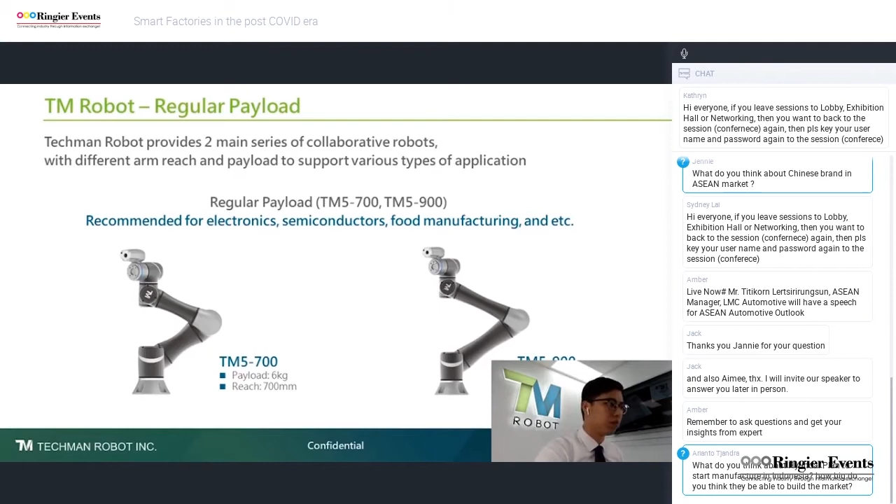And this is our medium heavy payload series, TM12 and TM14. In TM12, the payload is 12 kilograms with a 1.3 meter reach. For TM14, the payload is higher, 14 kilograms, but the reach is slightly shorter, a 1.1 meter reach. This is recommended in some industries like metal, doing machine tending, which need higher payload and longer reach.

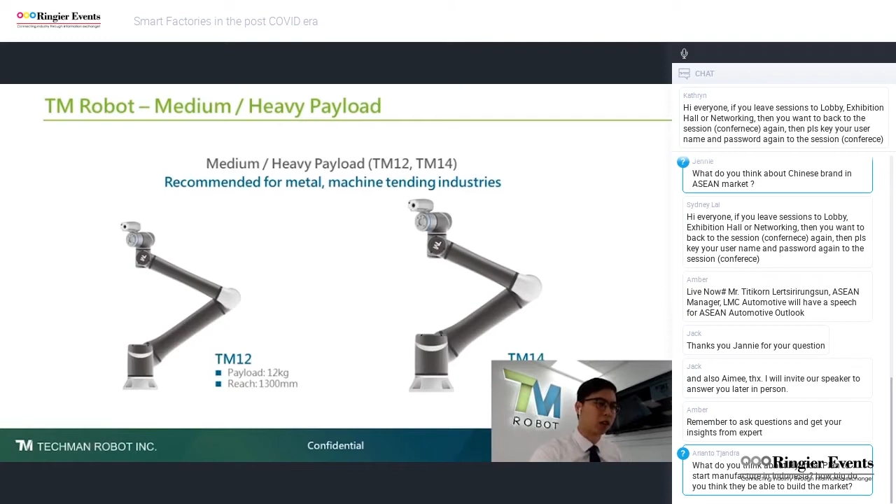And this is the TM Robot Mobile series. Why did we create this series? Normally, if you want to integrate robots with AGVs, auto-guided vehicles, you need an extra converter to change the power supply from AC to DC power supply. This converter costs extra money and takes too much space in the AGV. So with the TM M series, mobile series, you don't need to spend extra money and waste extra space in your AGV. You just buy it and integrate it with your AGV in a very short time.

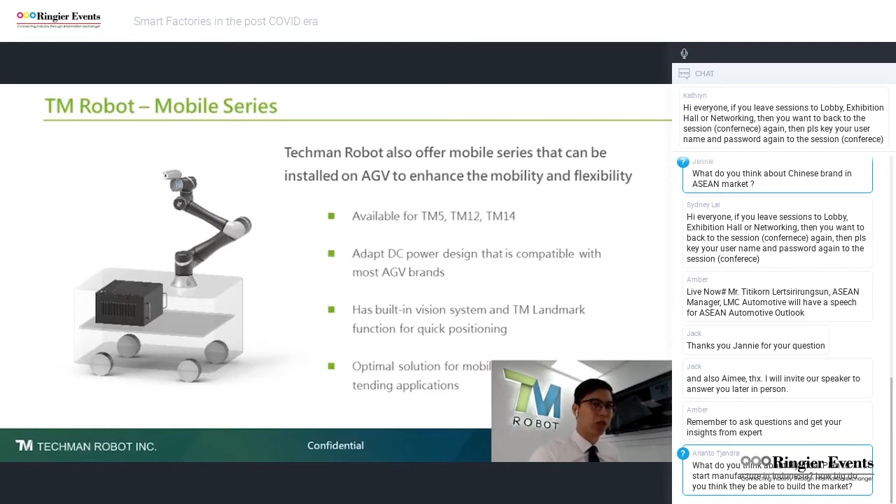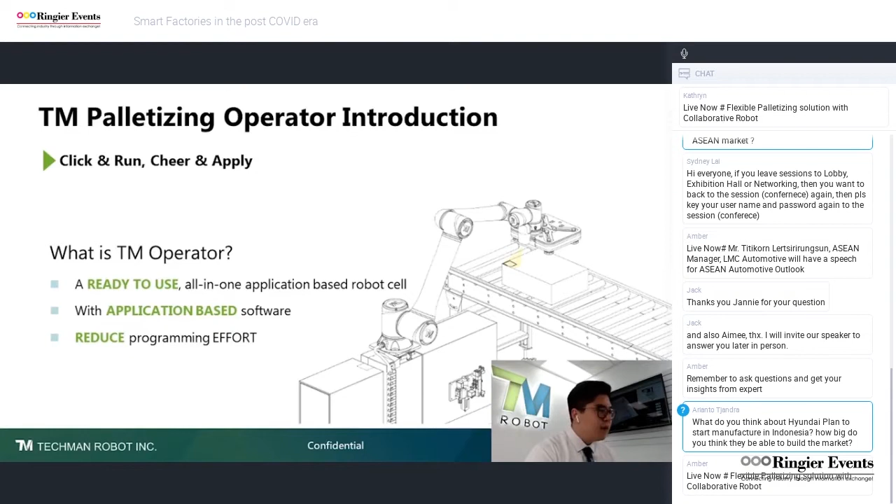About TM palletizing operator overview: it has excellent automatic palletizing solution advantages, such as speed up to 7 boxes per minute, and max payload can reach 10 kilograms. Safety is particularly important, which TM emphasizes greatly. This palletizing operator has 16 cell level safety functions. In addition to the robot, it also passed safety certification ISO 10218-2 with peripheral environmental equipment such as LiDAR.

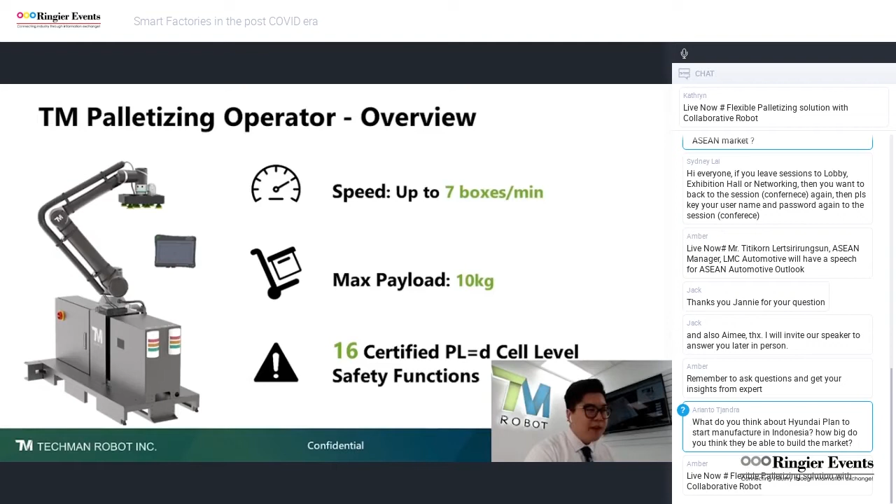About TM palletizing operator parts: the palletizing solution has a lifting pillar height up to 500 millimeters, with speed up to 7 boxes per minute, and a built-in safety controller that has partially passed Cat 3.

There's a built-in vision system that can compensate for cartons in different angles, and an adjustable flexible gripper where you can determine the gripper size you want, and also change the gripper you created. The maximum payload is up to 10 kilograms.

A teach pendant is included, so you don't need to use a monitor and keyboard again. The teach pendant also passed the safety certifications.

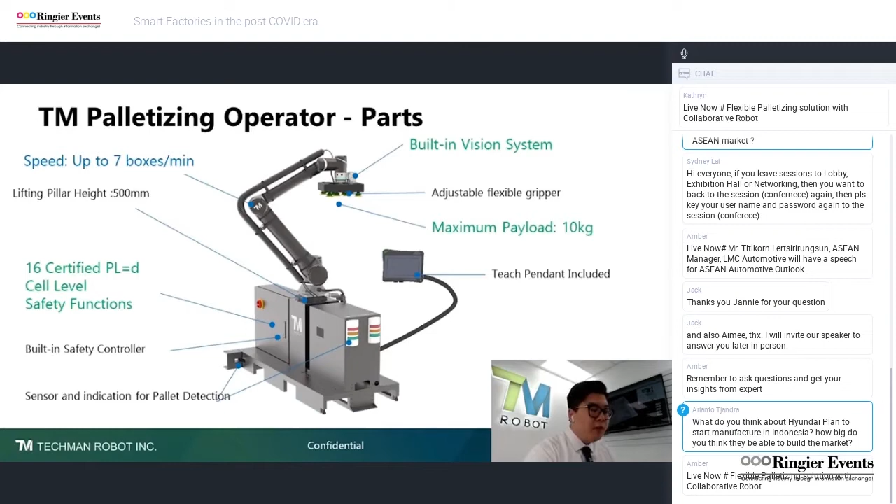We also have sensor and indication light for pallet detection. For example, if the pallet is moved out from the palletizing operator, the indication light will turn red and the whole project will pause. But if you put the pallet back to the palletizing operator again, the indication light will turn green, and you can continue the project with no need to start over again.

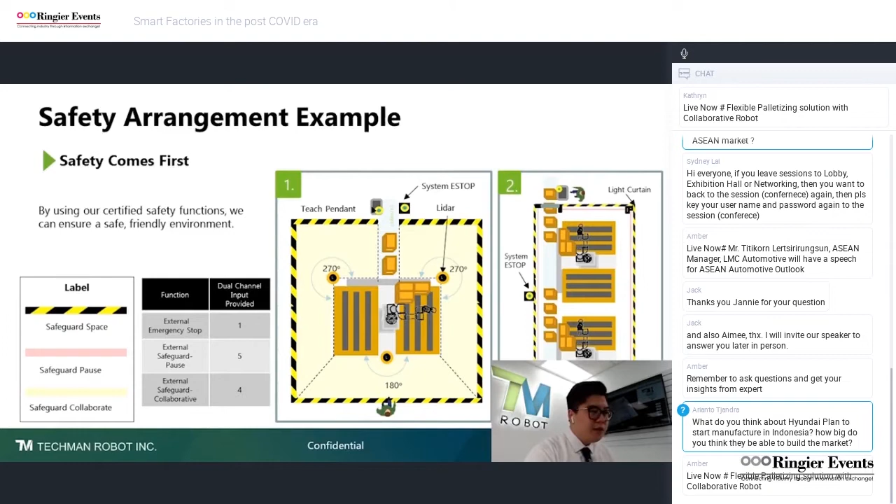Thank you very much. This is the palletizing operator.

Hello, this is Nick. In this last part, let me introduce TechMan's sales channels and our distributors all around the world.

In TechMan headquarters in Taiwan, we have 6 Taiwan distributors. In Southeast Asia, we have 16 distributors now. In Japan, we have 3. Korea, we have 4 distributors and 1 TechMan branch office there. In China, we have 25 China distributors and 1 TechMan subsidiary, 2 TechMan branch offices there. In Europe, we have 24 Europe distributors and 1 TechMan branch office in the Netherlands. In North and South America, we have 10 distributors now. So you can see we now have more than 60 distributors all around the world.

In the Southeast Asia region, no matter in Vietnam, Thailand, Singapore, Australia, India, the Philippines, or Malaysia, each country has at least 1 to 2 distributors which can provide you thorough service. So if you have any question, please contact us directly, or you can also find our distributor information on the TechMan Robots website.

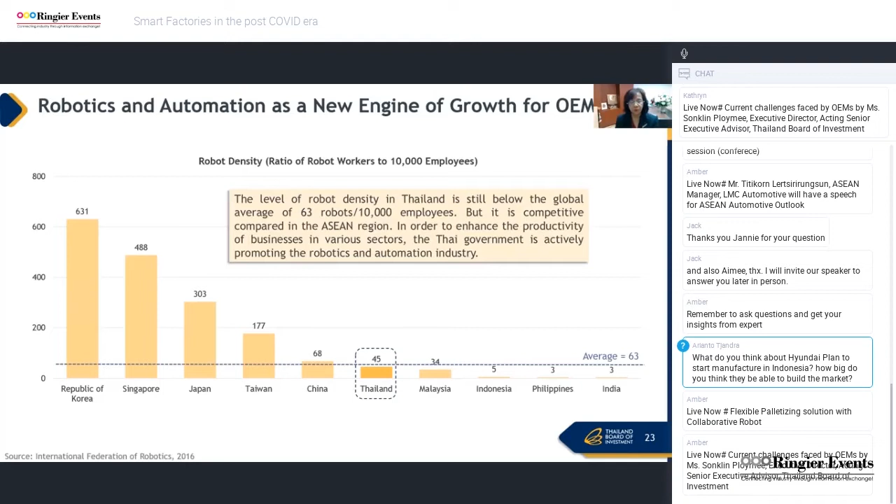The Thai government has also put actions in place to respond to these challenges, to help companies and keep Thailand's competitiveness. For example, the Thailand 4.0 policy has put next generation automotive as one of the target industries to be promoted. We also developed the Eastern Economic Corridor as a place to welcome investment in next generation automotive. The EEC is a project to develop advanced infrastructure and facilities to support investment in the automotive sector and other advanced technology industries.

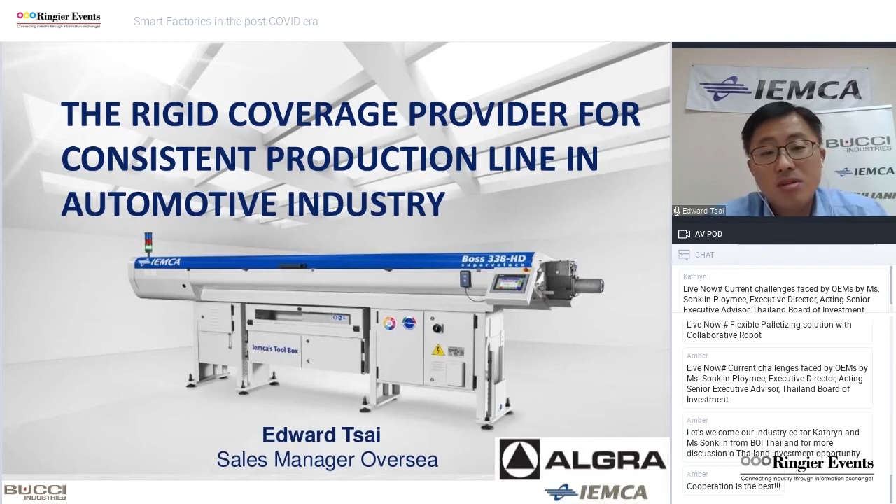Okay, thanks Jeff. First of all, let me introduce myself. My name is Edward Tsai, I come from IEMCA, Taiwan. We sell the bar feeder and the Algra power tooling holders. Today my topic is the rigid coverage provider for consistent production line in automotive industry. So you can see this is our bar feeder, and this is the Algra power tooling.

Here I come to the second page, automotive industrial. Because I think some customers or some audience attending this webinar do the same similar product, this is all the work piece that comes from my customer, so maybe you have similar products as well. It will be easy for you to get an idea what kind of my equipment can be equivalent to your product. Yes.

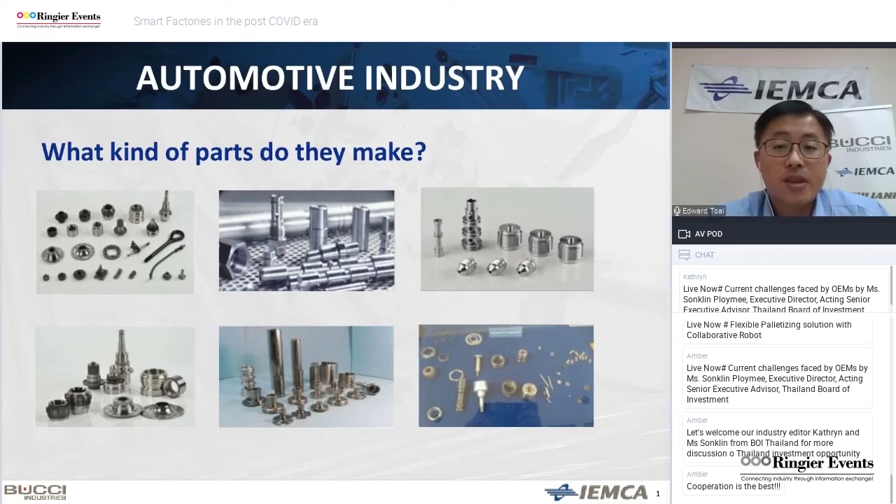On this page, I would like to talk about why use the bar feeder. The bar feeder is perhaps the most common automation accessory used in the metalworking industry. They generally apply to turning machines. They are designed to deliver continuous supply for raw machining stock, either round, hex, or square bar-shaped parts. The key point is we can increase productivity 15 to 30%. So that's the key point of why you use the bar feeder.

Of course, the bar feeder must be used with some conditions. You can see in this photo, this is a hexagon bar, and this is our IEMCA bar feeder.

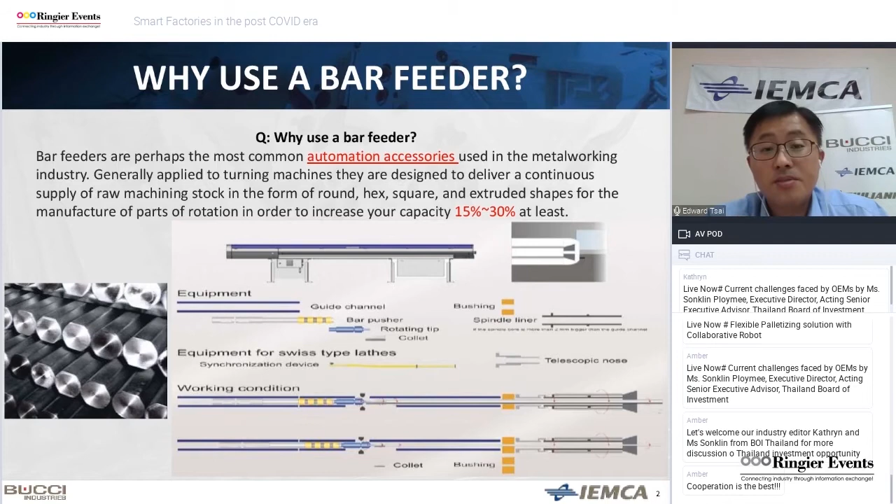On this page, I would like to talk about why, since there are many bar feeder companies, you should choose the IEMCA bar feeder. There are several key factors.

The first one is we can reduce tool operating times and simplify handling of raw material. The second one is the key point - and I have to say it three times because it's that important.

We can reduce the vibration transferred to the cutting zone, which reduces dimensional issues and improves surface finishing. The key point is once you reduce the vibration, you enhance tool life a lot, and you increase your surface finishing a lot.

Another benefit is we are able to let the machine tool operate at its best spindle speed, and we can minimize changeover time and reduce material waste. We can provide consistent, reliable operation to help the production line.

And as our slogan says, IEMCA is the worldwide leader of bar feeders.

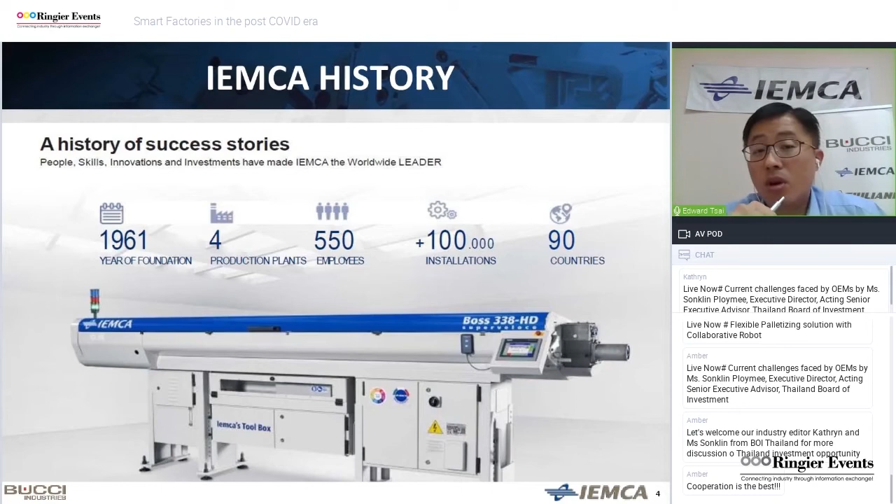On this page, I would like to talk about why IEMCA is the best bar feeder in the world. First, let me talk about my company's history. We were established in 1961. We have 4 production plants globally. We are a global company with 550 employees, and we have installed more than 100,000 bar feeders in over 90 countries.

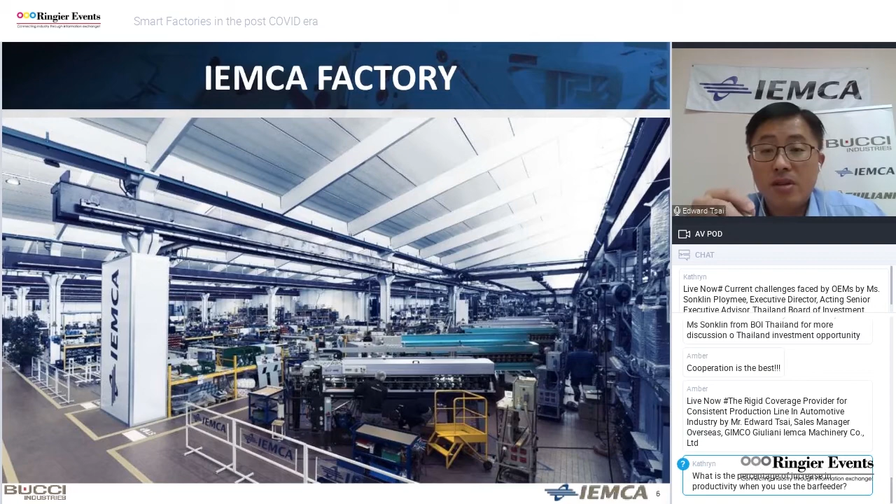On this page, you can see the IEMCA factory. Everywhere is inside an air-conditioned environment, so we fabricate the bar feeders all under AC conditions.

On this page, we have many patented designs. We have 50 R&D people and 35 patents, since we only design bar feeders. So we have 35 patent designs.

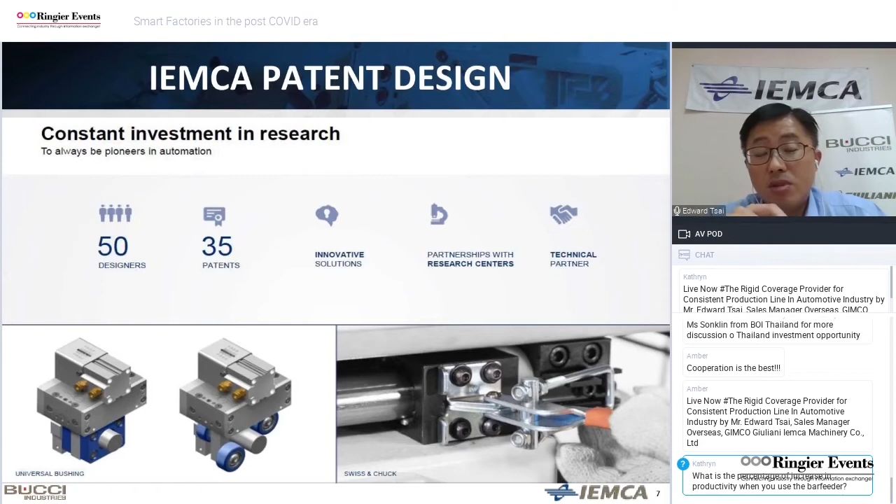On this page, I would like to show you something, because I think many presenters only use PowerPoint - I would like to show some video instead. Hey Jack, can you do me a favor and play my Boss series video? Thank you.

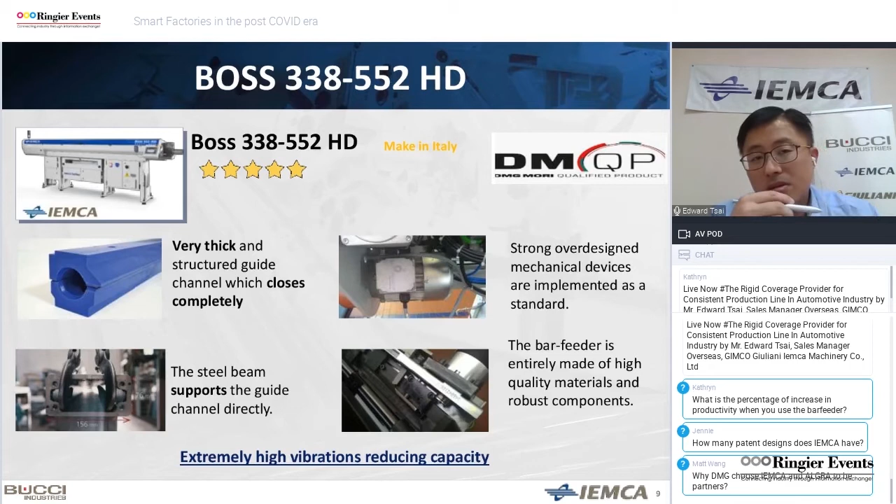Sorry, let me go back a page. This is the bar feeder we already have qualified for DMG Mori, the qualified product - you can see we got the DMQP. And in Taiwan, we have the same series, but made in Taiwan.

But we use the same factors, like the PU guide channel, which we also make in Italy. The steel beam is also made in Italy. But for some electrical components, we source from a Taiwan supplier.

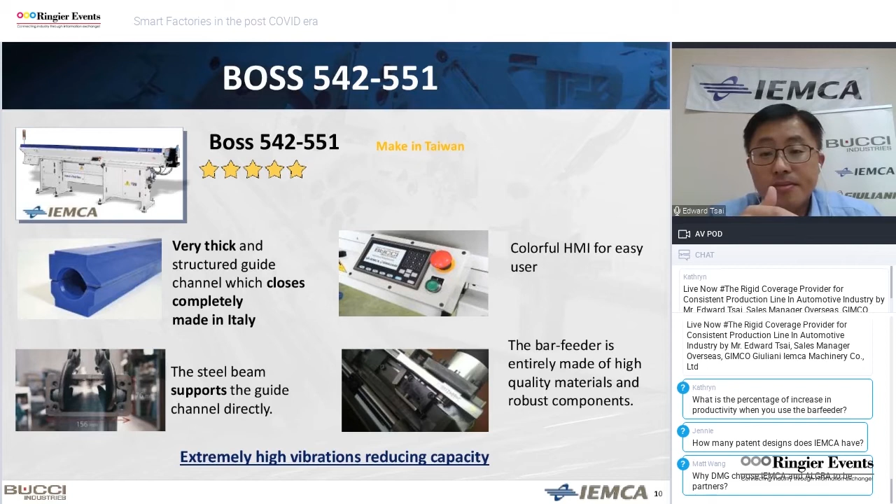There's also a bundle magazine option - if you have many bars, you can use this option to bundle a lot of bars together.

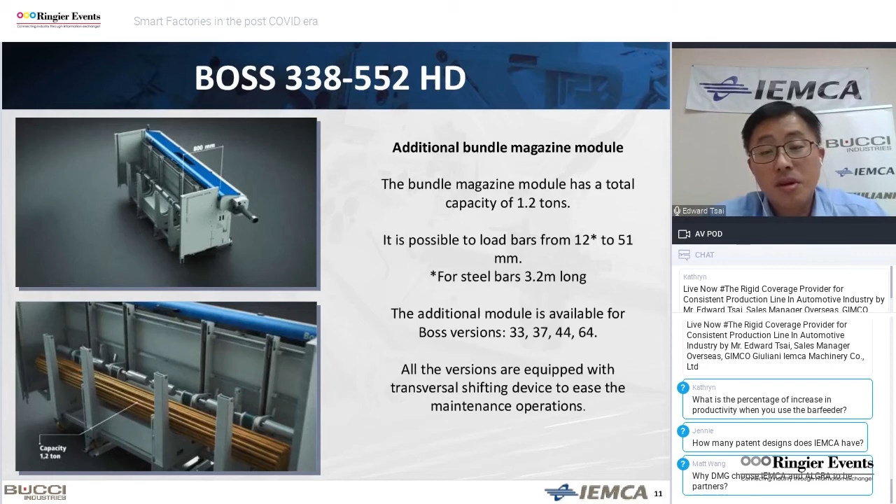Hey Jack, can you help me play the video? Wait a second - here I would like to show you why we became the DMQP partner for our IEMCA and Agra brand. Here we show the video.

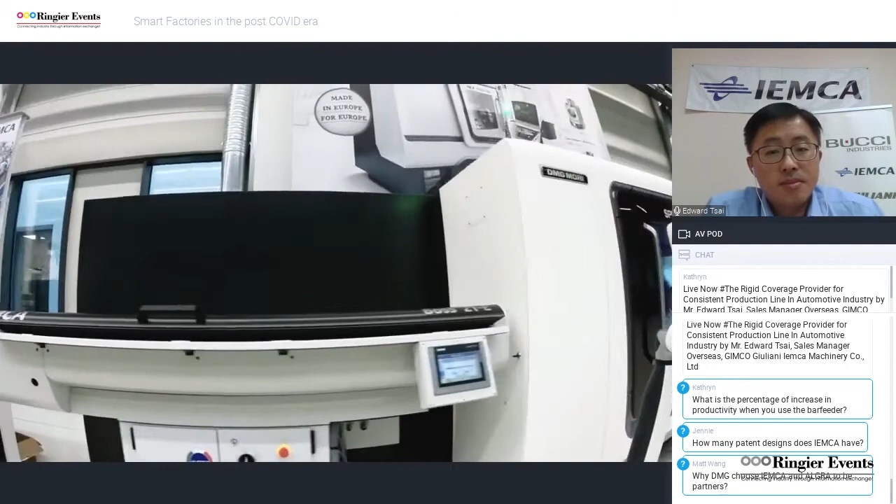So from this video, we can see just like IEMCA and Agra, we do a lot of testing in the DMG Mori machine. Finally, we get a DMG QP, which is a DMG Mori qualified product. It's a certificate for our IEMCA and Agra's product.

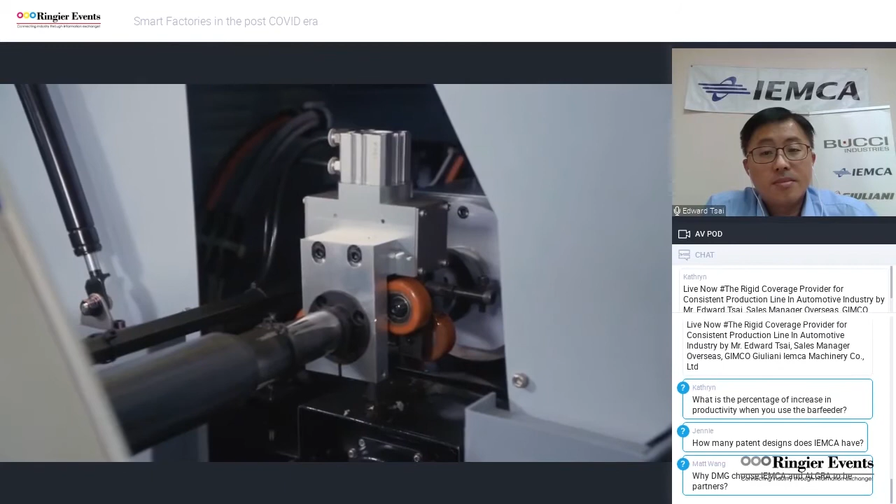This is my best friend in Thailand, located in Thailand Rayong. The company's name is Changxin. The owner is President Yao. Hey Jack, please help me play the travel video as well.

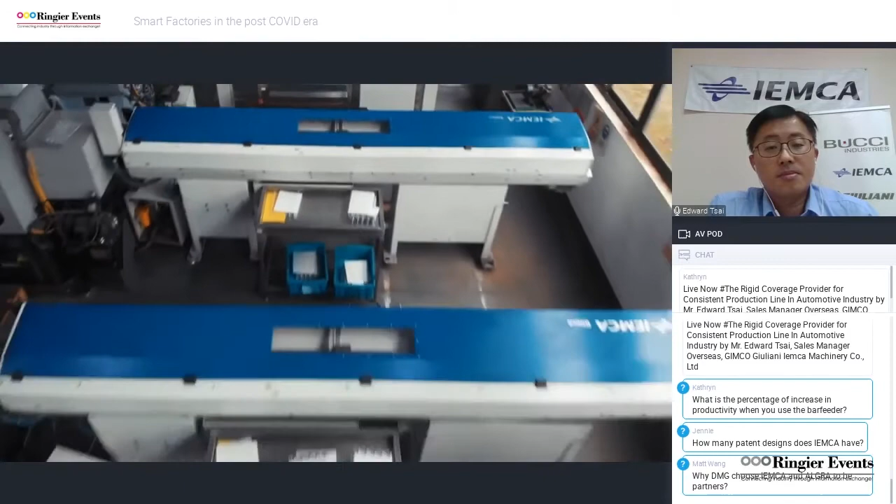I hope everybody can see a lot of the video, and I hope everybody can wake up now. Okay, my PowerPoint is going to end very soon. This is the couple page. Here, I just wanted to show you more.

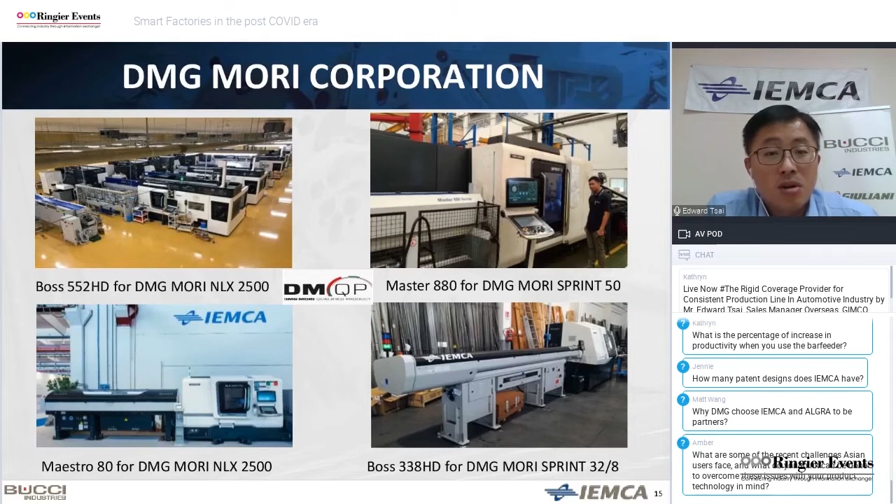This shows how close we are with IEMCA and ALGRA, our cooperation with our barfeeder and the ALGRA power tooling. This is some photos, you can see our series with ALGRA and our barfeeder with DMG Mori machines.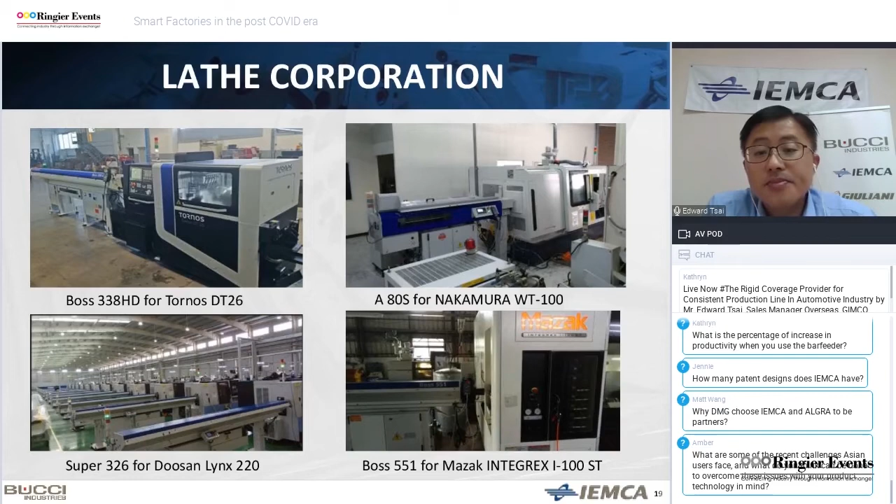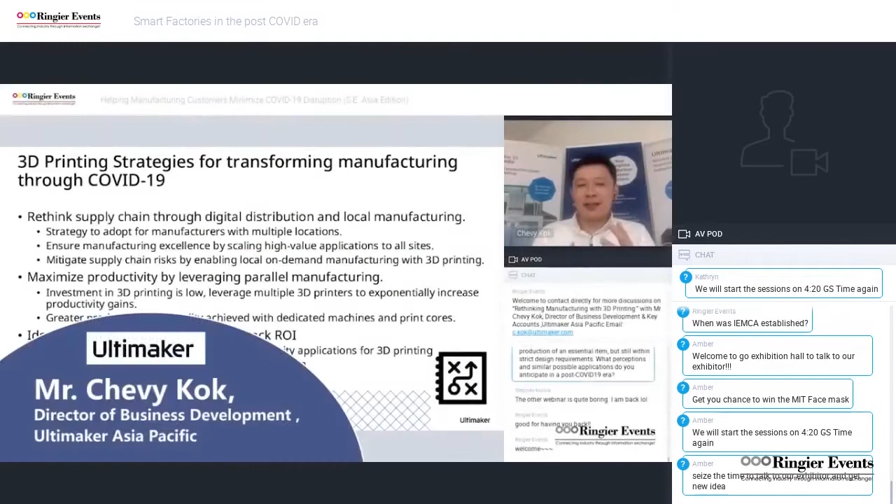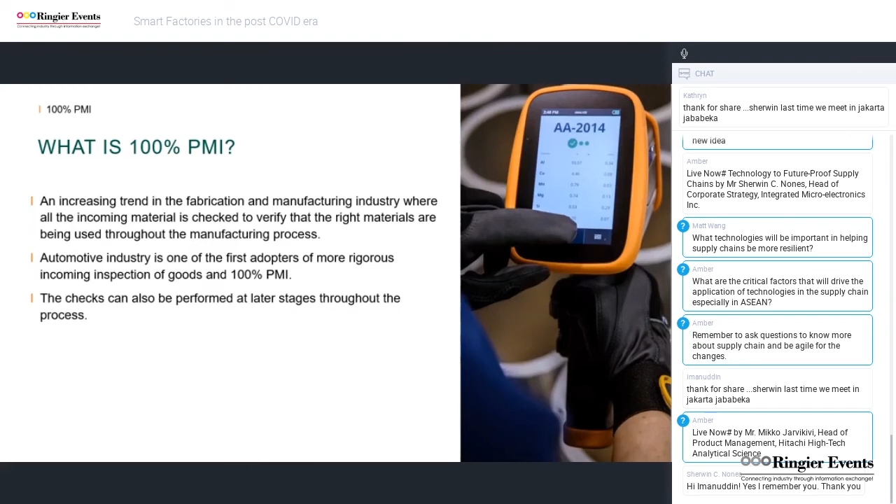Automotive industry is one of the first adopters of more rigorous incoming inspection and 100% PMI. Other industries are petrochemical, pharmaceutical, and also aerospace, of course. It is possible to do the checks throughout the process, from the point when you receive the material all the way to the point when you ship your component or your product to your customer.

So where in the automotive supply chain does PMI take place? The obvious one is incoming inspection. That is the most important part of the manufacturing chain, where you need to check that you are using the right material, because if the incoming material is wrong, everything from that point will go wrong as well.

In the worst case, resulting in a poor quality product that doesn't meet other specifications. So ensuring quality of raw material and verifying that material matches the certificate.

On the factory floor, you can also do additional checks to avoid any potential mix-ups, checking the material before expensive work routines and parts in a process such as CNC machining. In a couple of seconds, you can check that the part you are about to machine is actually made of the right material, and that gives you an additional layer of confidence to your process.

And eventually, in final inspection, you can check that the component manufactured is made of the right material before sending it out to your customers. These steps are not only to ensure the quality of the end product, but also strengthen the company brand as a trusted supplier. And as we know, high quality brands, trusted brands, are often also able to command a slightly higher end user price for similar components.

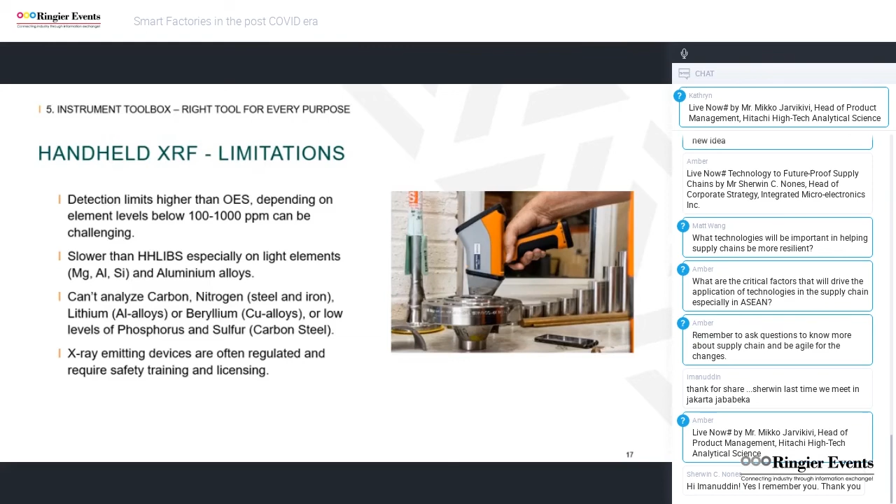X-ray emitting devices are often strictly regulated and require safety training and licensing. These licensing and safety training requirements vary depending on which country you're located in.

LIBS, on the other hand, is the ultra-fast sorter. It gives you alloy identification, meaning that if you need to know what alloy type you have in hand, in just 1 second. This could be 304, 316, 321 stainless steel, or it could be aluminium 2024, 7075, or anything similar. It gives you the alloy grade in 1 second.

However, if it is very important to understand the exact chemistry. For example, what is the nickel concentration in 304 stainless steel? In that case, XRF or OES is typically a better tool. This gives you ballpark information, typically maybe 5-10% analysis error, but it's not as accurate as the other technologies.

But it has no X-rays, it is very simple to use, it's easy to maintain, there are no breaking parts, and you can even measure samples in your hand. That makes measuring small parts much more convenient sometimes, something you'd never do with handheld XRF.

Limitations: analytical performance. Detection limits are higher than in XRF or OES. It can't analyze nitrogen, phosphorus or sulfur. These elements can be important in measurements dealing with steels, so it's important to understand that LIBS is not capable of measuring these three elements.

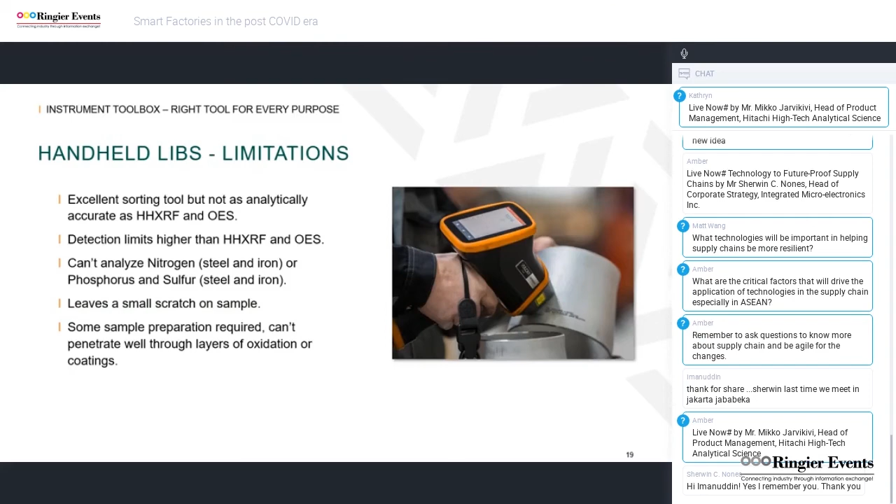OES, on the other hand, is the highest accuracy tool, able to analyze down to parts per million levels. It provides the ultimate performance on all alloying and trace elements. From a performance point of view, it's unbeatable compared to LIBS and handheld XRF.

It's able to even analyze low carbon, to do so-called L-grade separation, so 300 parts per million carbon in stainless steel, above or below. It's also able to determine duplex steel grades by measuring nitrogen, and it can also measure boron at very low levels in steels.

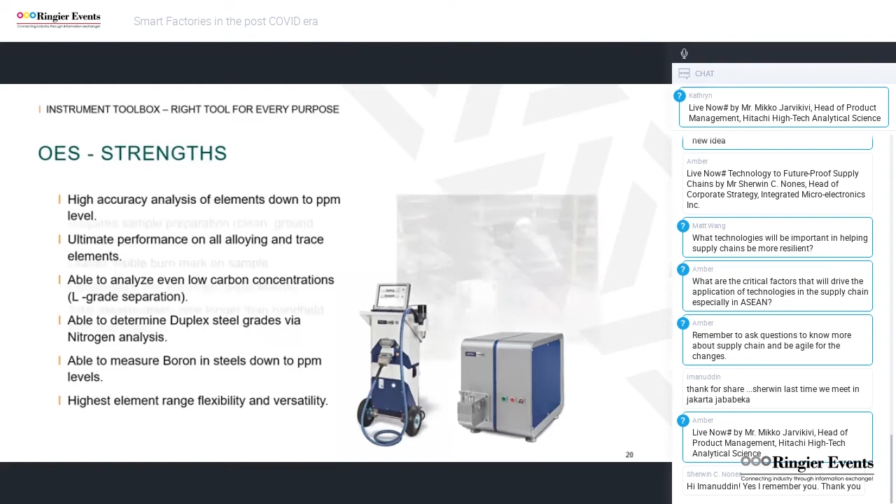It comes with limitations. Of course, it is big, it is bulky, it is certainly not handheld. You can see on the right how small the OES device can be, but that's basically one of the smallest devices on the market at the moment. It still weighs 15 to 20 kilograms and also requires, in many analyses, an argon gas supply.

It leaves a burn mark on a sample, and for calibration, you need to know what you're measuring. So if you're measuring steels, you often need to tell the analyzer that you are measuring steels. The total measurement time is also longer than in XRF and LIBS. But the flip side is that when you make a proper high quality measurement with OES, that is the highest level of confidence you can get from any technology today.

A couple of words about non-destructive testing, NDT. Some applications require 100% non-destructive testing, so you need to be careful which technology you choose, because the fact is that XRF is the only totally non-destructive technology available. LIBS always leaves a small burn mark on a sample surface, and OES also leaves a bigger burn mark on a sample surface.

Typically an incoming inspection of raw material can be done with any technology, and there's no NDT requirement, meaning that when you have raw material in your warehouse, it doesn't make any difference if there's a burn mark or not. But some end products can have very strict NDT requirements, and if there's a strict NDT requirement, the only technology you can actually use is handheld XRF.

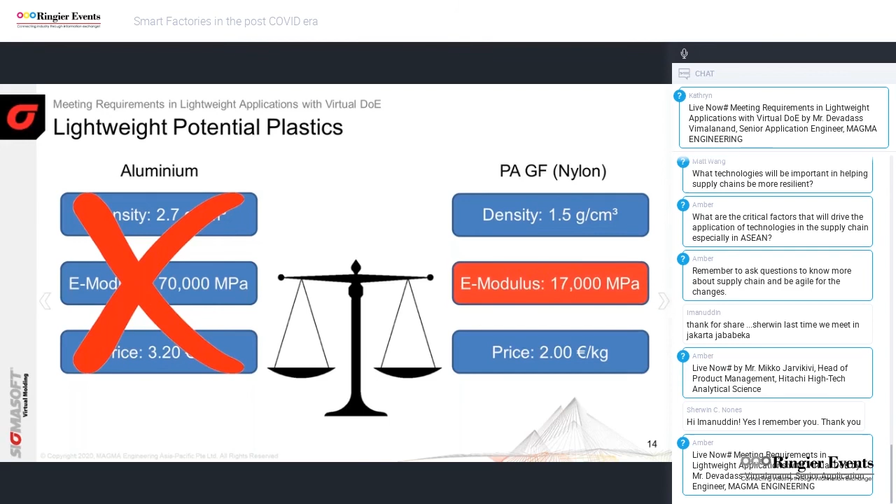This 17,000 megapascal is determined by the fiber orientation in the material. So it's important for us to understand the fiber orientation behavior of this material. When the plastic melt flows with a certain velocity, it generates shear rate. The shear rate at the skin layer is always higher than the shear rate at the core layer. Due to these differences in shear rate, the fibers are oriented and spin like this. So overall, the fiber orientation takes place like this in the flow direction.

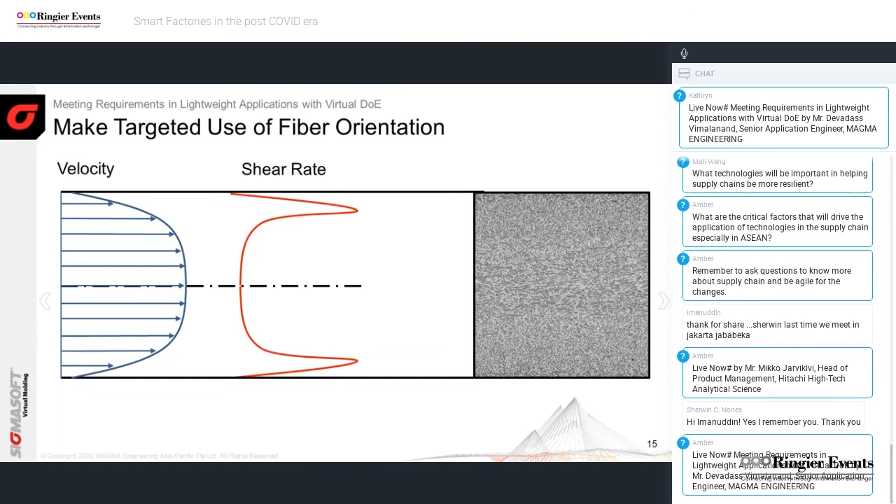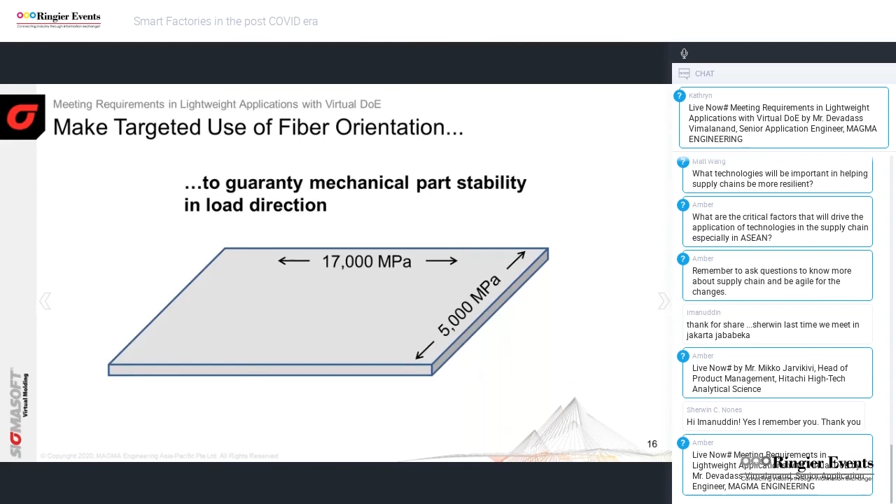It has 17,000 megapascal at the skin layer and only 5,000 megapascal at the core layer. In order to guarantee the mechanical property, we need to design it so that the fibers are oriented in the flow direction. It's the same for shrinkage.

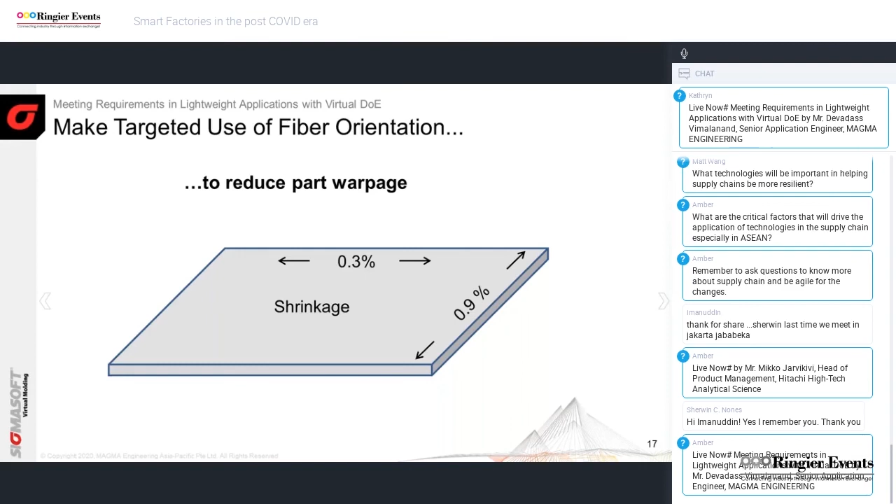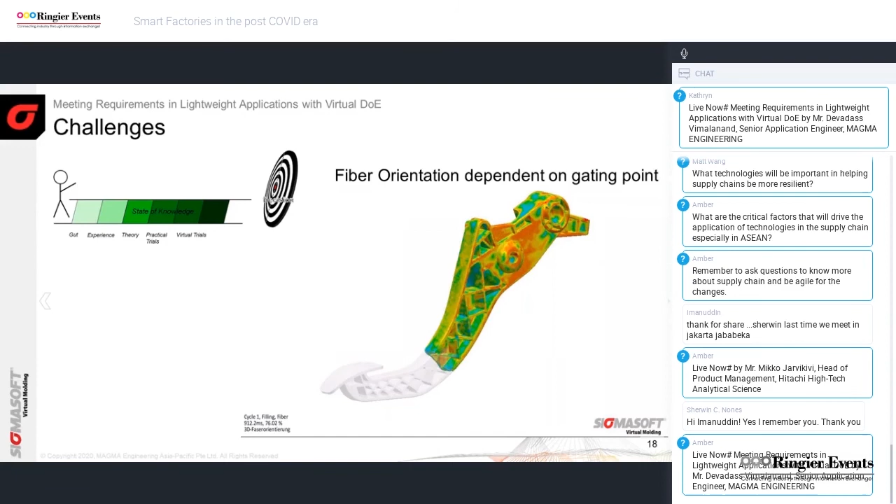Glass fiber materials behave anisotropically, which means there are differences in shrinkage in the flow and cross-flow direction. These differences lead to warpage. Warpage is definitely not good for product quality. So to achieve all the requirements, such as mechanical property and dimensional accuracy, we need to understand the fiber orientation and material flow behavior.

Fiber orientation and material flow depend on the gating point of the product. So it's our responsibility to find the best suitable gating point to fulfill all our requirements.

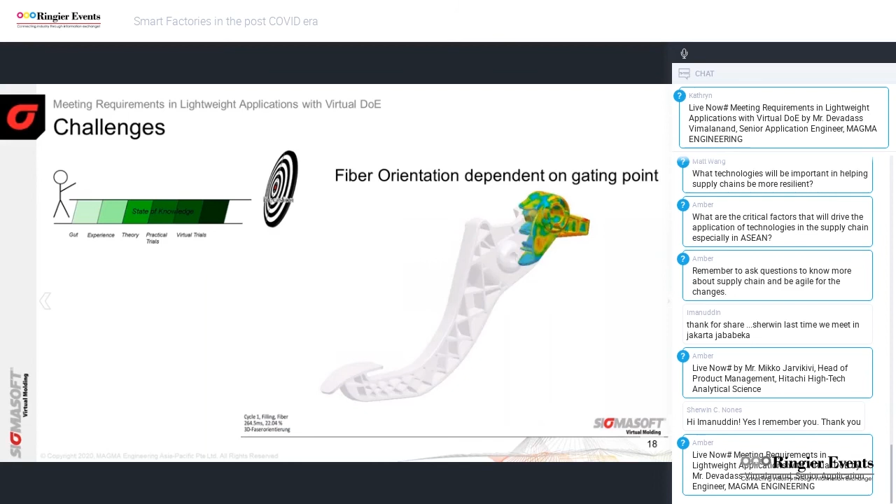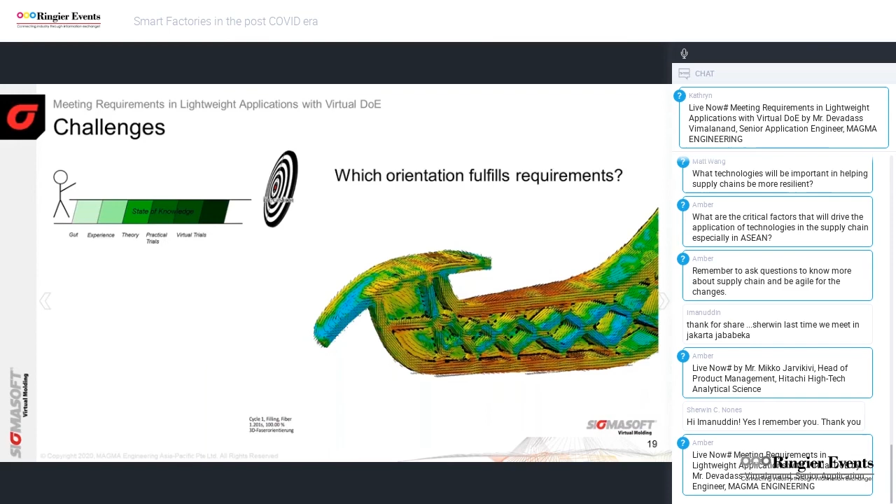For this case, the gating point is located on the top of the product. So we have a Young's modulus of 5,000 at the center and 17,000 megapascal at the skin layer. Same thing for the shrinkage - it has 0.3% in the flow direction and 0.9% in the cross flow direction. So is this gating point suitable and able to fulfill all our requirements?

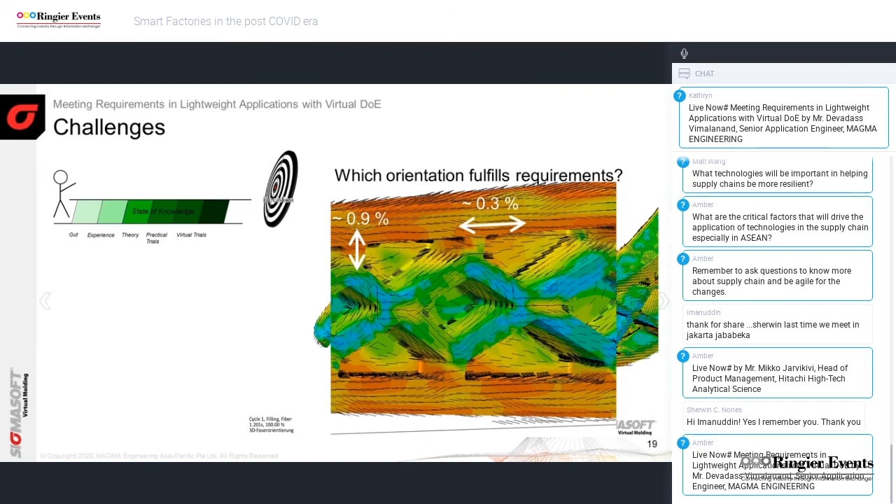To answer that, we need to use the DOE option, which is available in SigmaSoft. Okay, what is DOE? Design of experiment. DOE is an effective tool used to find out the importance of the factors and understand the relationship between the factors and response.

When we think the factors are important for the response, we can set all the factors in the DOE in SigmaSoft and analyze to find out the importance level. We set the variables, then we select the objectives. Now it is ready for simulation. Once the simulation is completed, we can analyze the results.

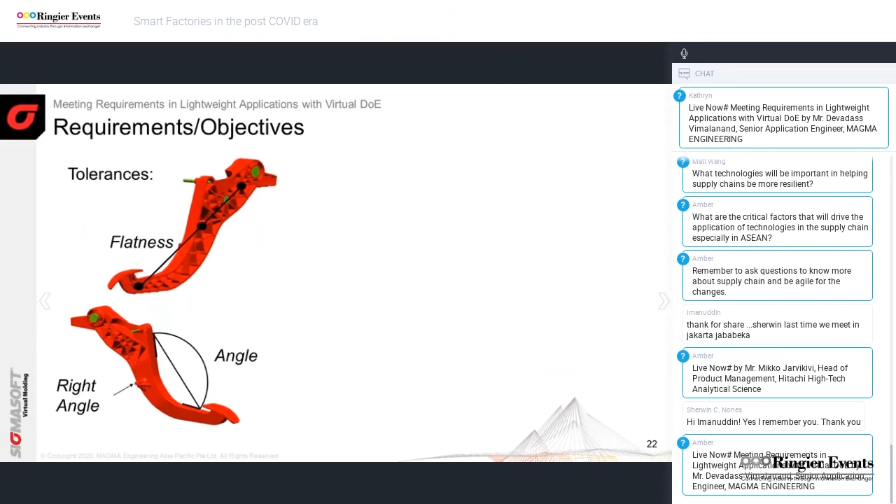Okay, now let's go to our case study. We have the dimensional requirement. We also have the mechanical property requirement. Even though SigmaSoft is dedicated for plastic injection molding simulation, it is still possible to perform and analyze some of the mechanical properties.

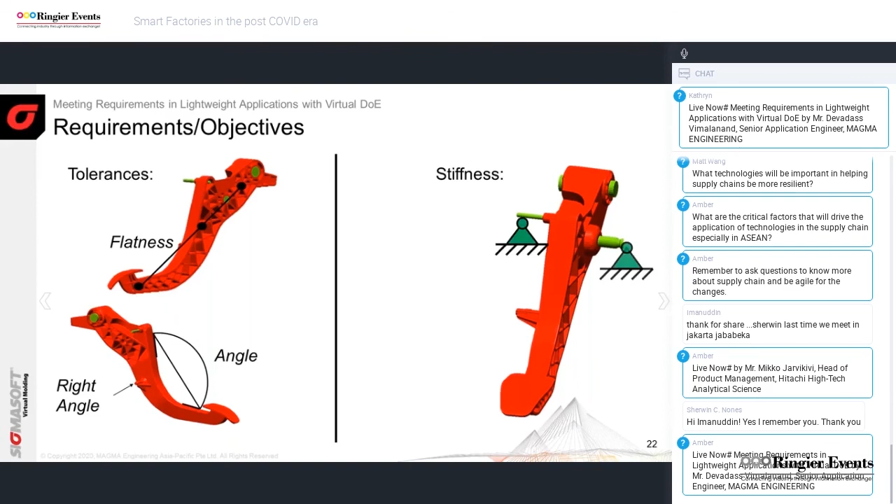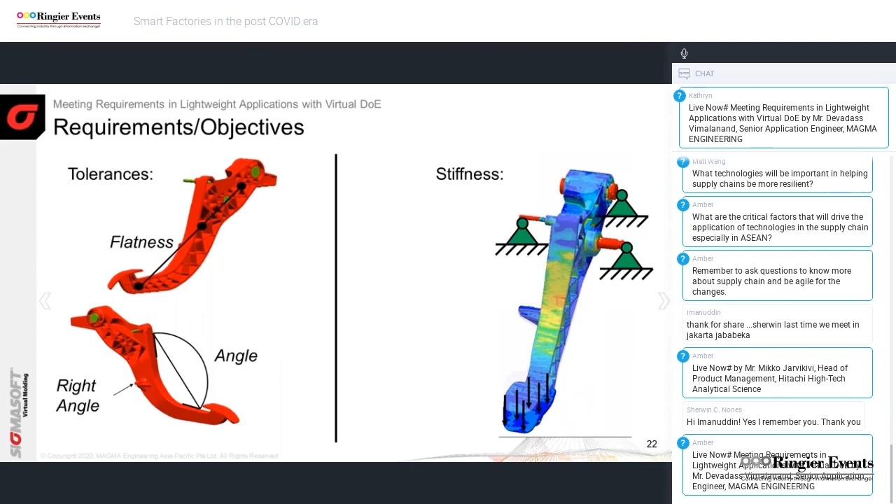For this case, we want to know the stiffness of this material. To understand that, we fix a boundary here and apply load to understand the deformation of the part. With this information, we are able to identify the stiffness of this material.

We set the requirements, set the objectives. Now we want to set the variables, which means factors. As I mentioned earlier, gating point is important for the fiber orientation and material flow behavior.

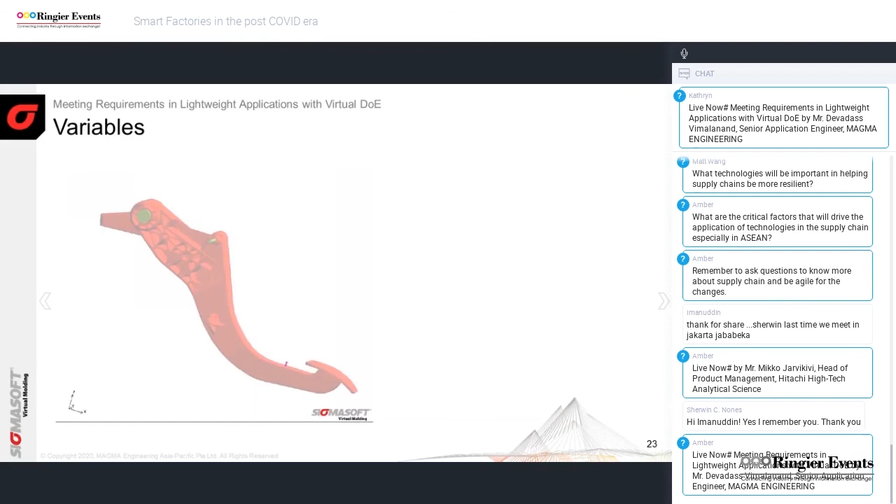So I have already selected some of the gating points as shown here, to find out the best gating point to fulfill all the requirements. Together with this gating point, I also selected materials with different glass fiber content, like nylon with 15% glass fiber, nylon with 30% glass fiber, etc. I also selected packing pressure as one of the variables, because packing pressure is used to compensate for shrinkage and warpage. So with only these three variables, we are able to get more than 80 designs for the simulation.

Do you think for these 80 designs, how long it takes to test in a practical way? Maybe it needs more than a week or even a month to complete all the designs in a practical way, to understand and find out the best design from there. Not only that, it is also very expensive and time consuming.

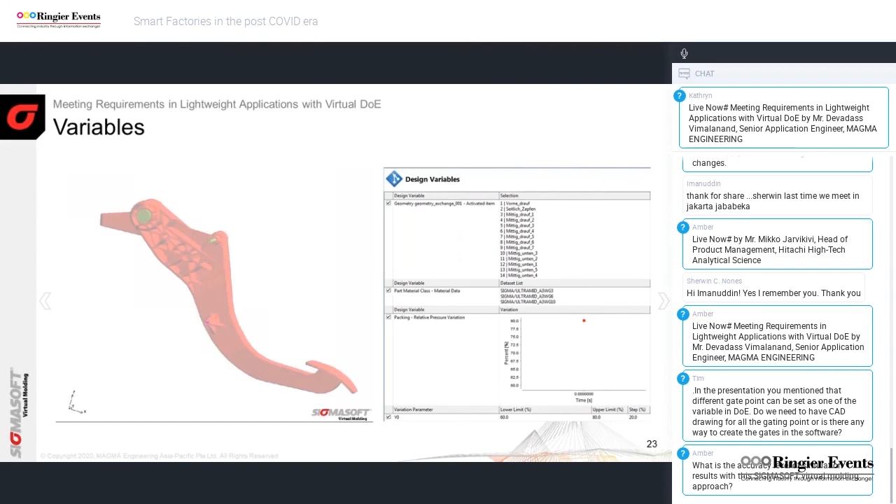But in SigmaSoft, it is easy and affordable. It may take less than a day to complete all 80 designs and find out the best design from there. Okay, how can we do that?

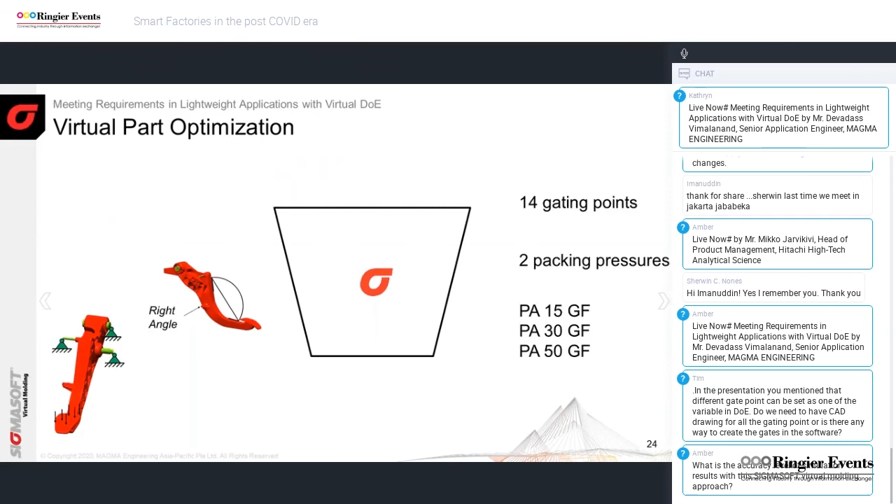We know the requirements, we also know our variables. We just need to set the requirements and variables into SigmaSoft. SigmaSoft will analyze and provide the results for all 80 designs. Now you have the simulation results for more than 80 designs in your hand. Now it's your job to compare all these 80 designs to find out the best one. But comparing 80 designs to find the best one is not easy.

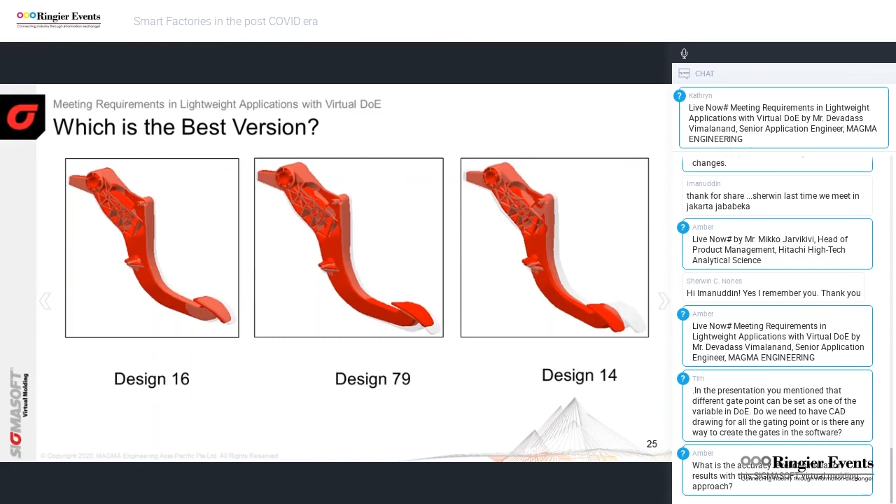It's a very time consuming job. How to find the best design from there? But don't worry, SigmaSoft will never ask you to compare all 80 designs to find the best one. In SigmaSoft, we have a feature called the automatic ranking system, which shows and provides an overview of all the designs and their ranks.

The ranking is selected according to the weightage that you set. The weightage can be changed at any point in time, and the ranks also change accordingly.

For this case, I have selected design 18 and design 21 as the best designs to fulfill all the requirements for our application. But you can ask me why I selected these instead of design 1 and 2. Okay, I will explain that.

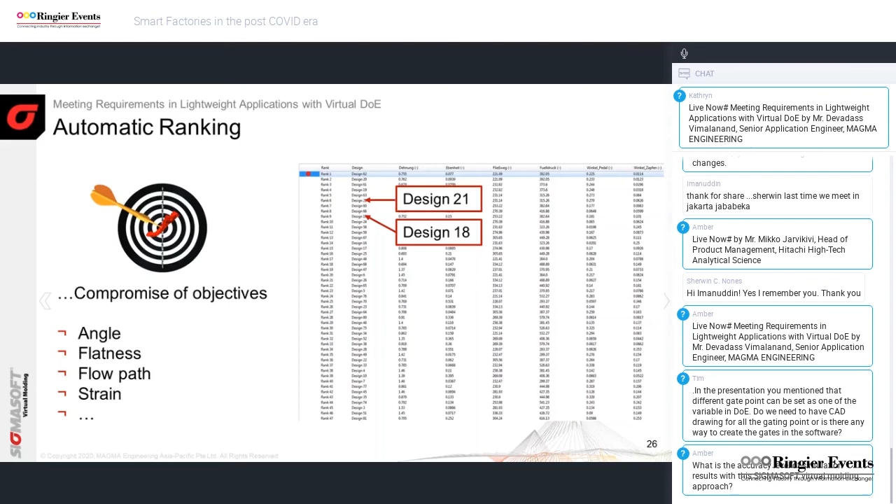In SigmaSoft, we have another feature called parallel coordinate plots. In this, we have our variables, we also have our requirements. You're also able to see there are a lot of colorful lines in the plots which represent the individual designs, meaning there are more than 80 lines representing the 80 designs.

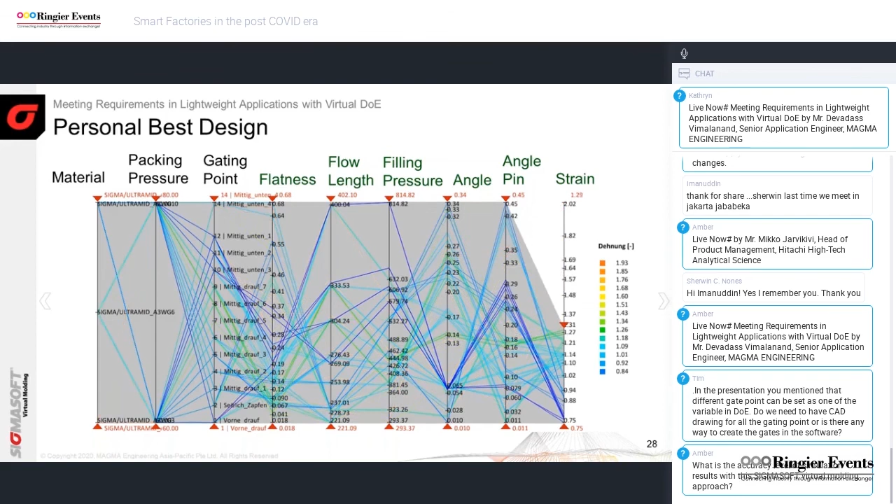There are also red color arrows on the top and bottom of the plots, which help us set the requirements. For example, I want to set the strain value at a certain level. Same thing for the flatness and the rest of the requirements.

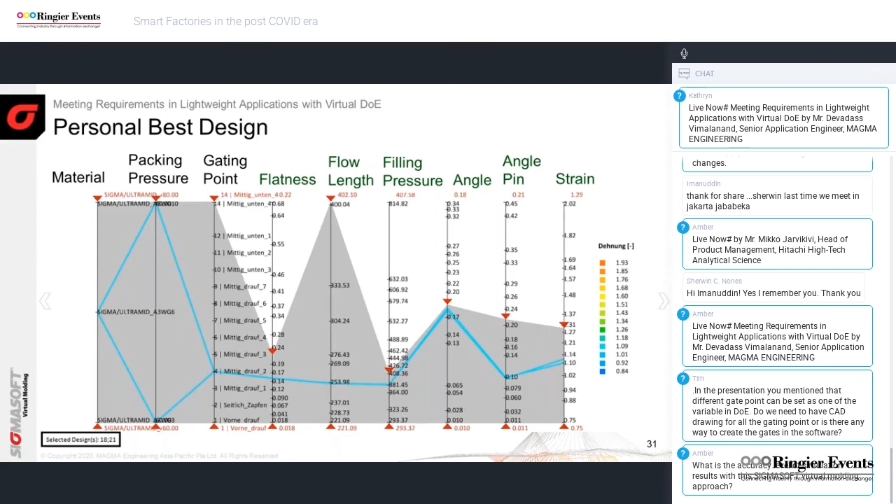Now there are only 2 designs left in the parallel coordinate plots, which are design 18 and 21. This is how we select design 18 and 21 as the best designs for these requirements. Now it is easy for us to compare with the animation videos for all the results to find out the best design to fulfill our application's requirements.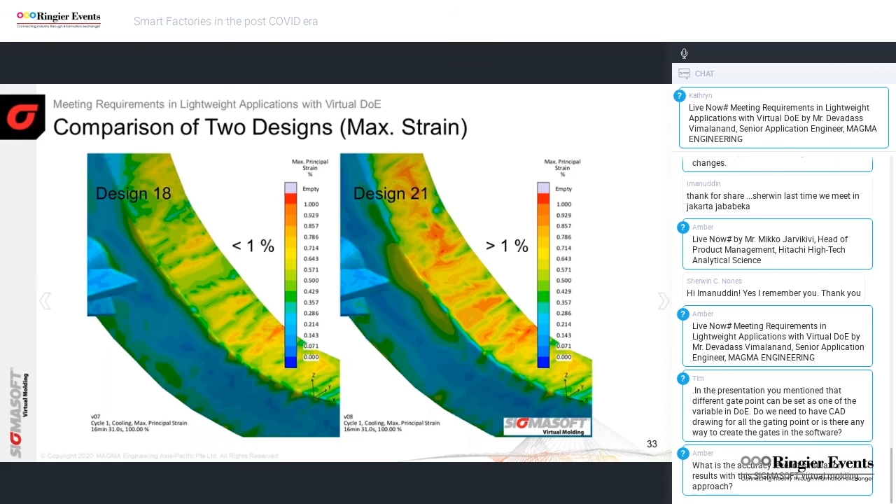That brings us to the summary of this presentation. Even a simple part like this clutch pedal can lead to a problem if the fiber orientation is taken into account. It increases the risk level when we make the decision for our situation. SigmaSoft virtual molding approach helps us to provide more information and make the right solid decision, minimizing the risk level.

We need to understand that the right decision is always a compromise decision. For example, when we want to reduce the cycle time, somehow it's going to affect the quality of the product. So we need to find a balanced design to compromise both requirements. SigmaSoft's DOE option helps us to increase the chances of making the right decision.

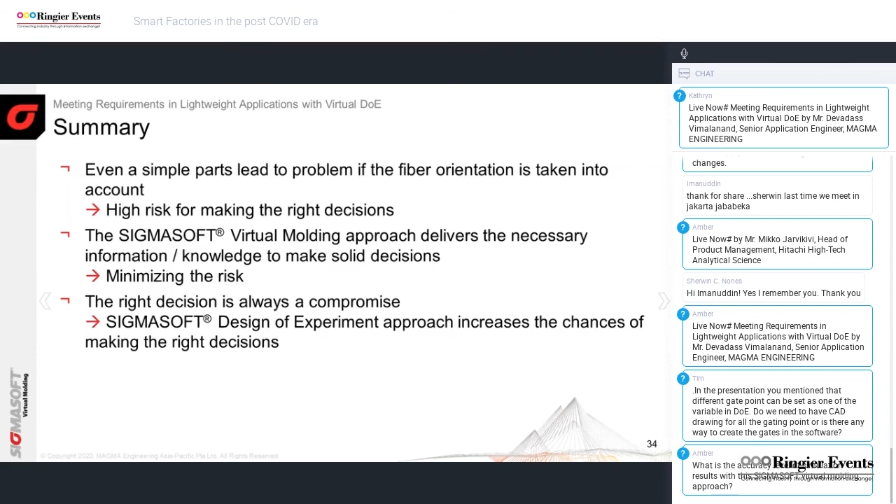Thus, SigmaSoft helps us meet and make the right decision while eliminating all the unnecessary time and money that we plan to spend on practical trials. Not only that, it also provides more information through this virtual trial to increase our gut feeling and experience.

That's the end of our presentation. I believe this presentation explained how SigmaSoft provides more information in order to achieve the requirements in lightweight applications.